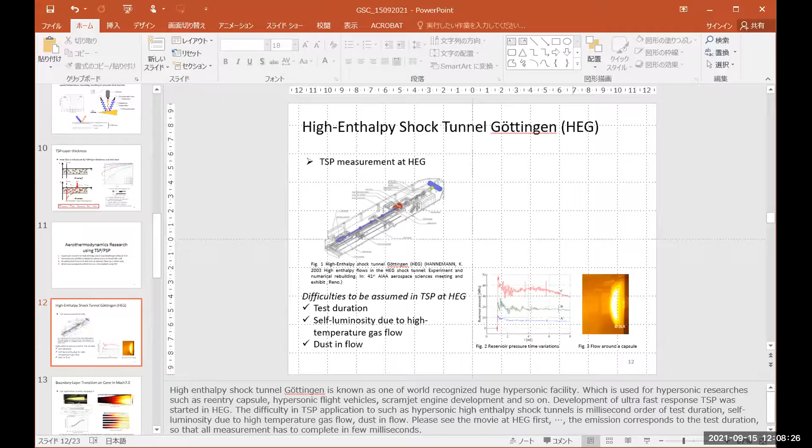Okay, can I start? Okay, so you'll have to stop sharing your screen, Robert. You'll have to, yeah, go ahead. Go ahead, Hiroshi. Share your screen. Okay, can you see the screen? Yes. All right. Yes. Okay.

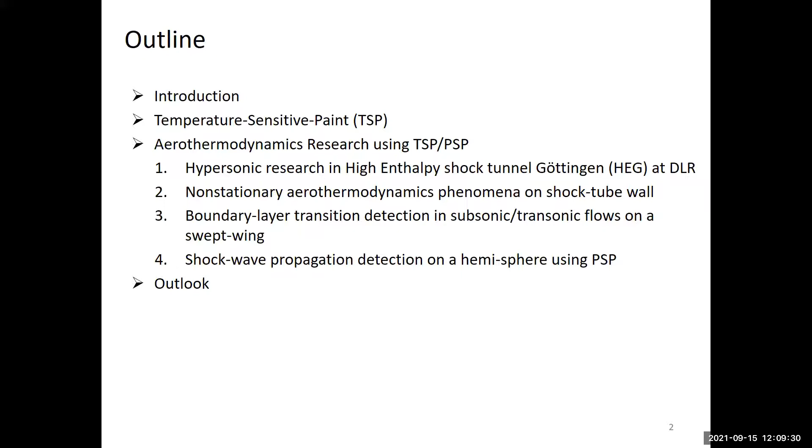So today I will talk about the frontier research issues in high-speed aerothermodynamics. This is a very broad topic, but I will try to focus on my research. And yeah, thank you so much for attending. This is an outline of this talk. First of all, I will briefly introduce hypersonic aerothermodynamics. After that, I will show temperature sensitive paint, which is optical diagnostics for high-speed aerothermodynamics. Then I will show the aerothermodynamics research using TSP and PSP, these optical diagnostics, and I will show 4 results. And then finally, I will show the outlook of hypersonic research.

This is a typical hypersonic phenomena around the hypersonic vehicle. And as can be seen, can you see this cursor? No? Okay. All right. Okay.

So once the vehicle flies at much higher Mach number, first of all, a strong shock wave is formed around the body, and there are several phenomena which are not seen in low-speed aerodynamics. For instance, please see the leading edge of the vehicle. A strong bow shock is formed, and around the leading edge of the blunt body, a strong normal shock is formed. Behind the strong normal shock, temperature and pressure increase drastically. With increased Mach number, the distance from the blunt nose to the shock wave becomes very small, which means that the pressure and temperature increment is much, much higher than at low Mach number.

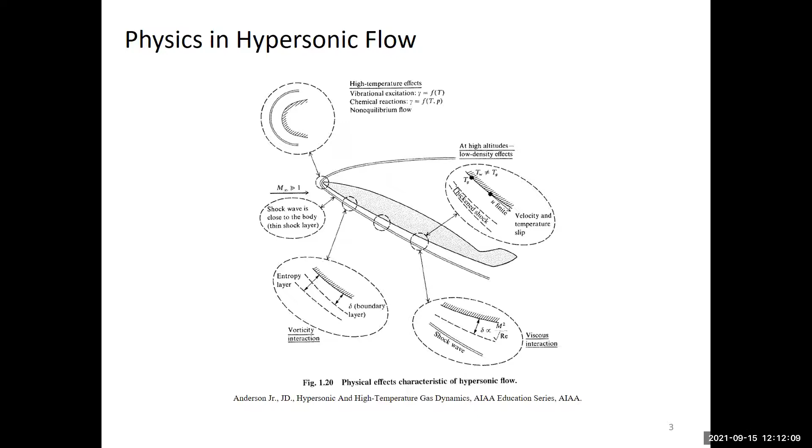This is one example of a hypersonic vehicle, the X-43. In the actual body, there are various aerothermodynamic phenomena. For instance, the external flow field of the airframe, in which the heat transfer is very, very important. Around the body, laminar to turbulent boundary layer transition occurs, and in the development phase of the vehicle, the transition location should be predicted, and turbulence modeling should be developed for simulation. Also, as I said, there is no ideal flow field around the body; high temperature gas effects exist. And on the forebody, transition to turbulence occurs. Once boundary layer transition occurs, the heat transfer increases drastically.

And also this vehicle flies in hypersonics, therefore a shock wave generates, so that shock interaction occurs. This shock interaction phenomena increase also heat transfer drastically. And for instance, the maximum heat transfer due to the shock interaction exceeds the stagnation point heat transfer, which is more than 20 times of the stagnation point heat transfer.

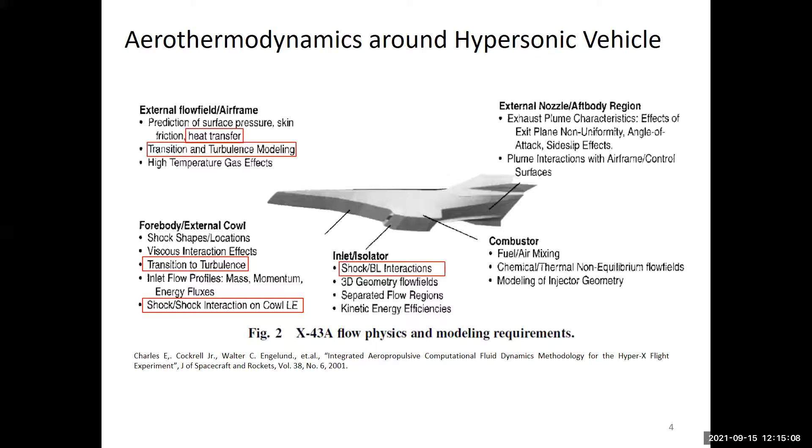So to realize such an actual vehicle, there are many aerothermodynamics phenomena, and that has to be investigated in advance. So briefly, we can summarize why the hypersonic research is important. As I mentioned, in hypersonic flight, the vehicle suffers from severe heating load due to the laminar to turbulent boundary layer transition, also the shockwave boundary layer interaction, and also the shock-shock interaction. And these phenomena cause very severe heating load, so that in the developing phase, accurate heat transfer measurement or estimation should be carried out carefully.

And to conduct such experiments, we employ the very short test duration high-speed wind tunnel named shock tunnel. In this facility, the typical classical measurement technique is used, like thin film gauges or thermocouples or coaxial thermocouples. And these are very reliable traditional sensors. However, mounting many of these sensors is very, very difficult because of the wiring. Therefore, optical flow diagnostics for global heat transfer measurement, satisfying high spatial temporal resolution, becomes paramount. And one of these optical flow diagnostics candidates is a temperature sensitive paint.

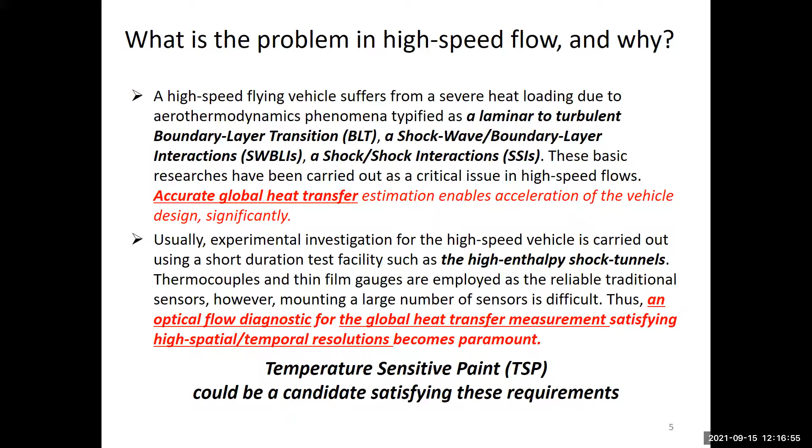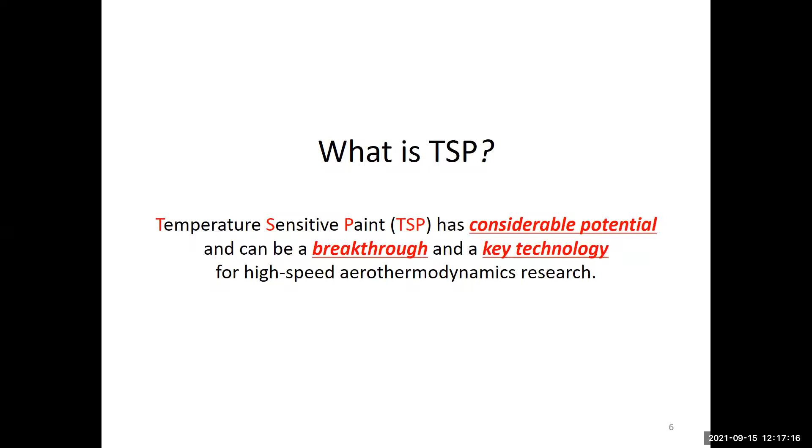Okay. And then people think, what is a TSP? TSP is a temperature sensitive paint, which has a very strong potential and reliability, and which is a key technology for high-speed aerothermodynamics research. So TSP is a molecular-based imaging technology, which is a non-intrusive optical flow diagnostics. In TSP measurement, the nanosize luminophore works as a temperature sensor, and these various nanosize sensors are distributed on the model.

And this luminophore has specific physical properties as follows. For example, each luminophore has specific absorption and emission wavelengths and also lifetime, and also quantum efficiency, which is relating to the emission intensity, and then Stokes shift, which is the gap between the absorption peak and emission peak wavelengths. And the thermal and oxygen quenching. This is the technique of the pressure and temperature sensitive paint, and also thermal photo degradation. These specific properties are very important in each luminophore.

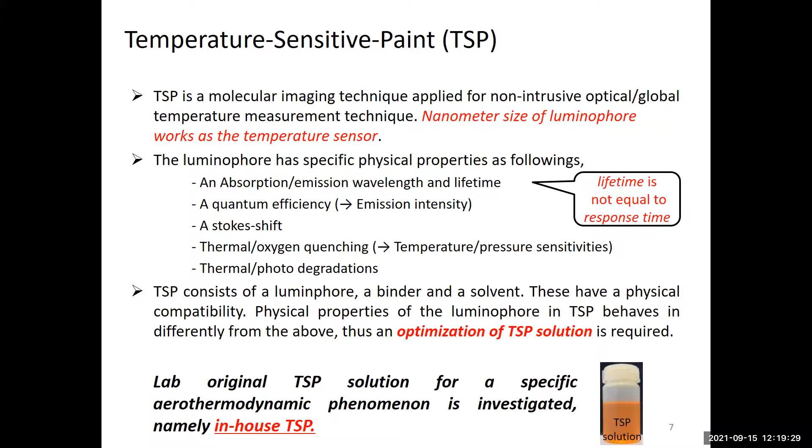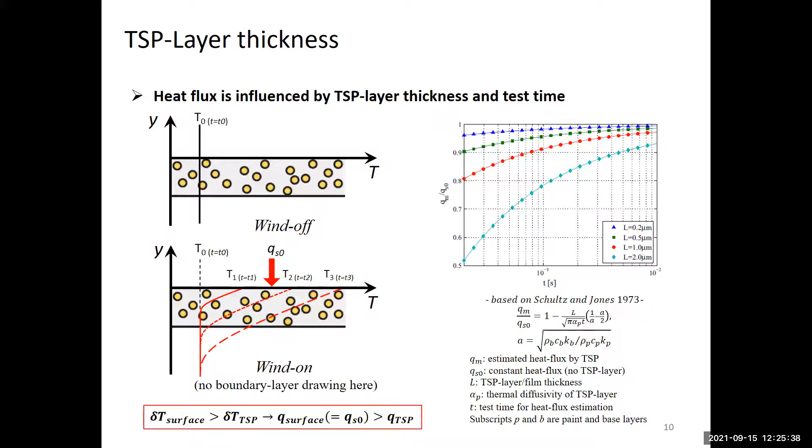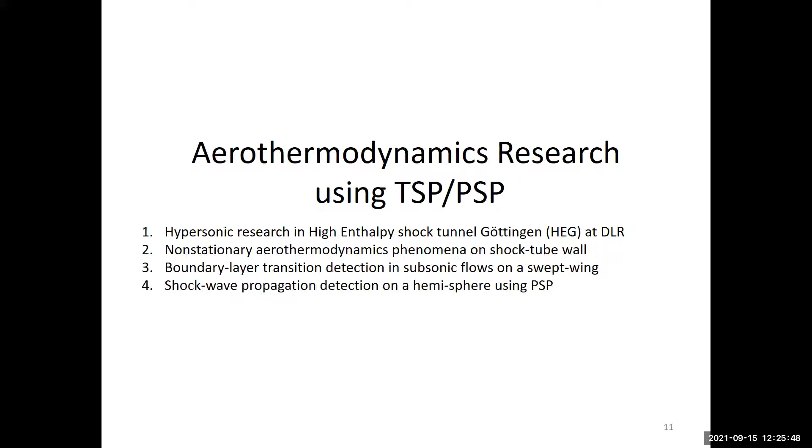And then from here, I will show the TSP application to hypersonics and also non-stationary aerothermodynamics. As mentioned in the introduction, to conduct such hypersonic tests, a very huge wind tunnel, shock tunnel, or high enthalpy shock tunnel is employed. This is a high enthalpy shock tunnel in DLR, where I have researched. This shock tunnel can produce a test duration of milliseconds.

And also this wind tunnel produces hypersonic and high enthalpy flow, so self-luminosity occurs, as seen in re-entry vehicles. And also this type of wind tunnel employs a diaphragm to produce high pressure and high temperature, so the ruptured diaphragm produces dust in the flow. So these three things are difficulties in a high enthalpy hypersonic shock tunnel.

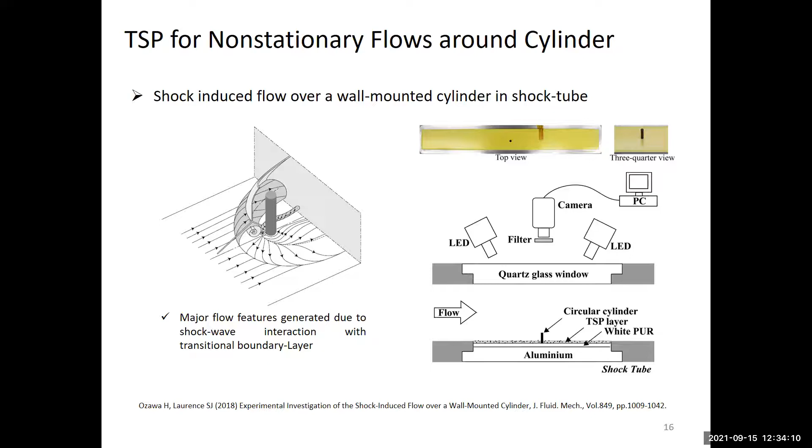So TSP could visualize the non-stationary flows, the incident shock waves, and also turbulent boundary layer transition. We can easily find out where the high heat flux is, and we can compare the flow field in space and on the surface. So anyway, this demonstrated that the TSP can respond in 1 millisecond.

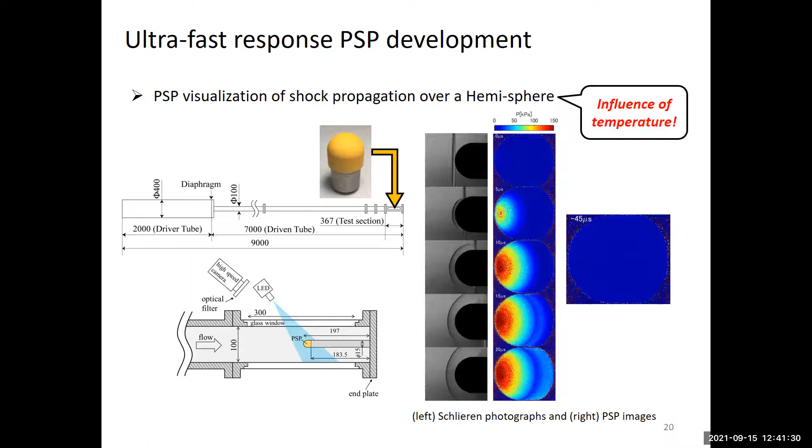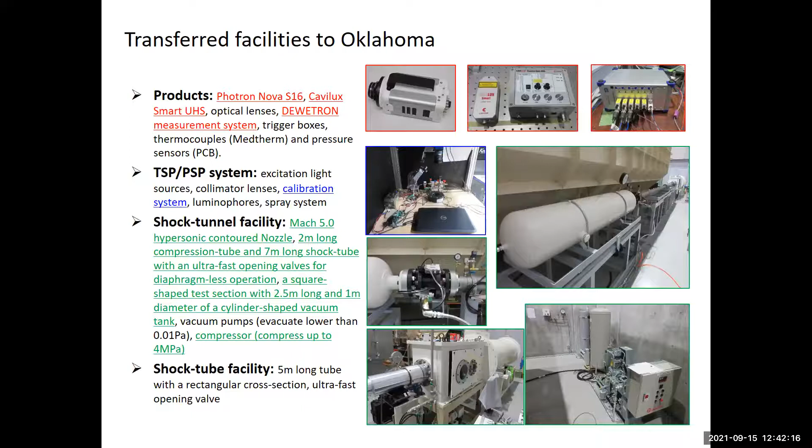And second is hypersonic boundary layer transition. This is a very important topic, and boundary layer transition research has been carried out since 100 years ago, but hypersonic boundary layer transition is slightly different from low speed flow because a different type of transition occurs. So what is important is how to detect the transition location, or how to predict the transition point. And the most important is the analysis of the transition mechanism in hypersonics.

And then TSP in free flight objects. As mentioned before, the object, for example the test model, should be fixed before, after and during the test duration. But if TSP is applied even to a moving model, that is one topic. And next is TSP and PSP application to actual models.

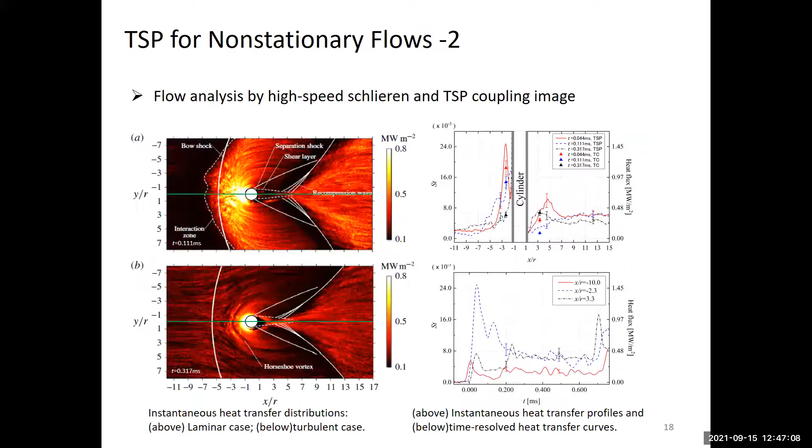So I may be missing something here, but could you just explain for me? What I understand is that you are using TSP for measuring temperature, right? The surface temperature, so you are making an optical measurement of the surface temperature distribution, right? Yes. And then in your slide 10, what you present is actually heat flux, right? Heat flux ratio, one with the TSP and the other one without. But temperature and heat flux are two different things. So you got the measurement of temperature, but how do you convert it to heat flux?

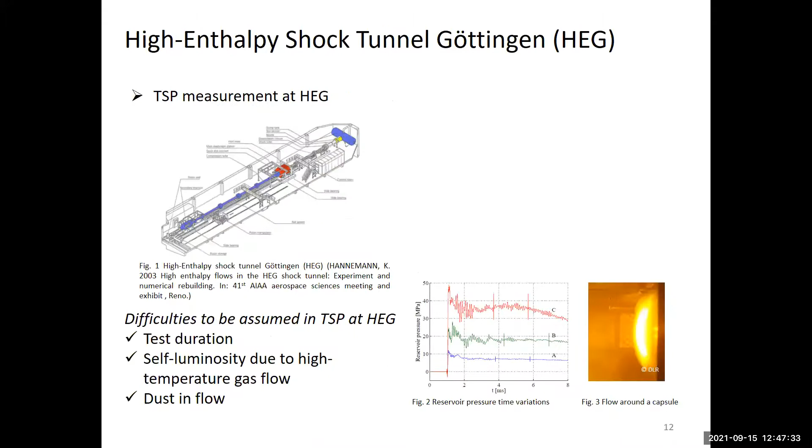Also, I have a question: to use this, you still need to do the calibration, right? Yes. And what I understand is that you also have a thermocouple, right? So you use a thermocouple for temperature measurement, and you calibrate against the thermocouple readings? So how do you do the calibration? Okay, just a moment. To calibrate TSP, I employed a thermocouple. PT100 is used for calibrating the TSP. So what kind of thermocouple do you use to calibrate the TSP? PT100.

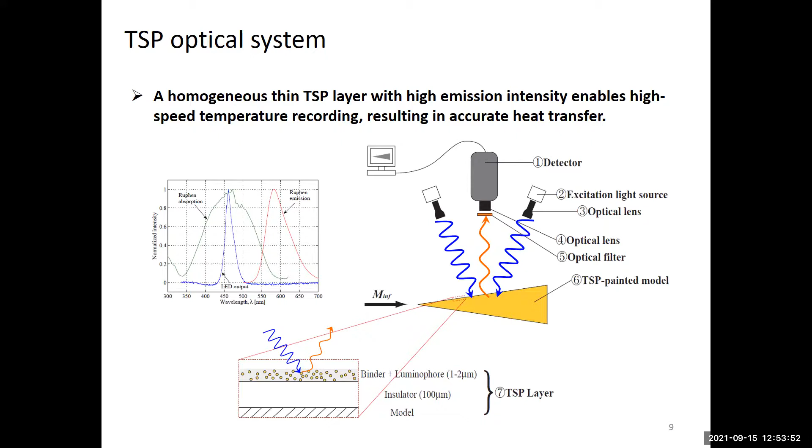Okay, I think I may have had my microphone on mute earlier. The topics you listed at the end, are those ones you are interested in working on, or do you also include some more general problems in aerothermodynamics? You mean the outlook? Yeah. Are these all things that you're looking at personally in the future? Yeah. But this is maybe part of my interest. Maybe there are other interesting topics. Okay.

You know, some of these were pretty fundamental, and I was wondering, are these all the fundamental ones in this area, or are there some more fundamental ones that you didn't mention that you're aware of? Yeah, right. Some topics are very fundamental research, and some topics are more application.

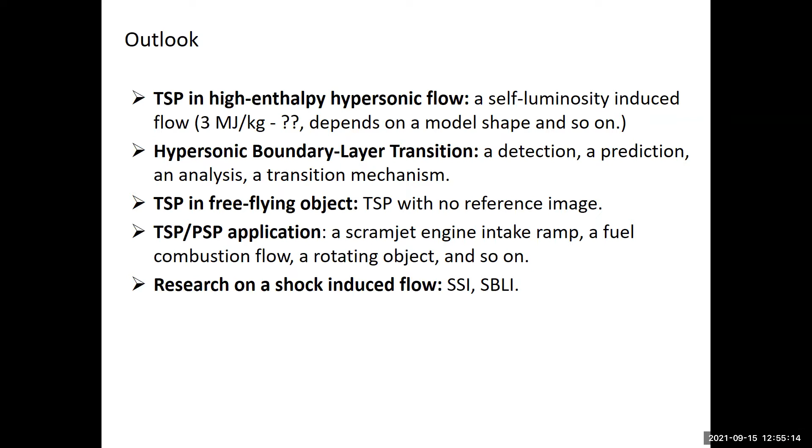All right, I have one more question, if you don't mind, Dr. Ozawa. Sure. The question I have is on your slide 17, when you do the experiment on the shock tube. Yes. In the video, I saw that after the shock wave passed through the cylinder, sometime later there's a backflow coming back from the right side. Can you explain why? Why there's a backflow, the bounce back? Yeah.

So first of all, the test section is here, right? After the shock wave passed the cylinder, a reflected shock wave comes back from the right-hand side. Okay, so the shock tube on the right-hand side is closed? Yes, right. So it's not just a discharge to the ambient? What do you mean, ambient? I mean the atmosphere. So it's a closed

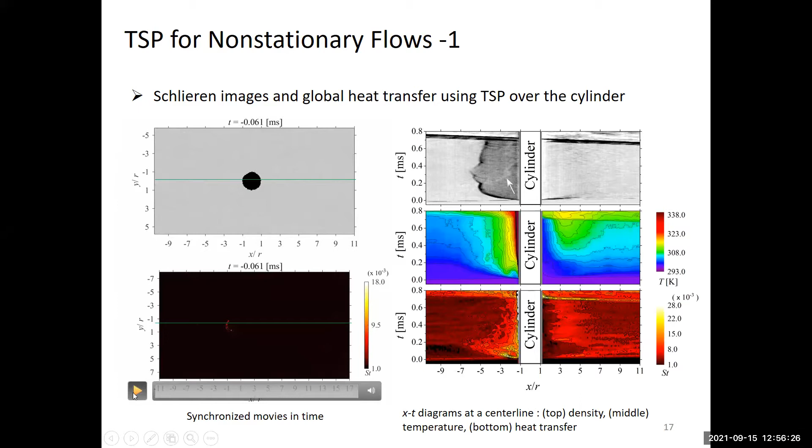tube? Yes, closed tube. Both sides are completely closed, so as seen in this configuration, the driver tube is closed and also the driven tube is closed. This is to control the shock speed. Okay, I see. Thank you. Thank you.